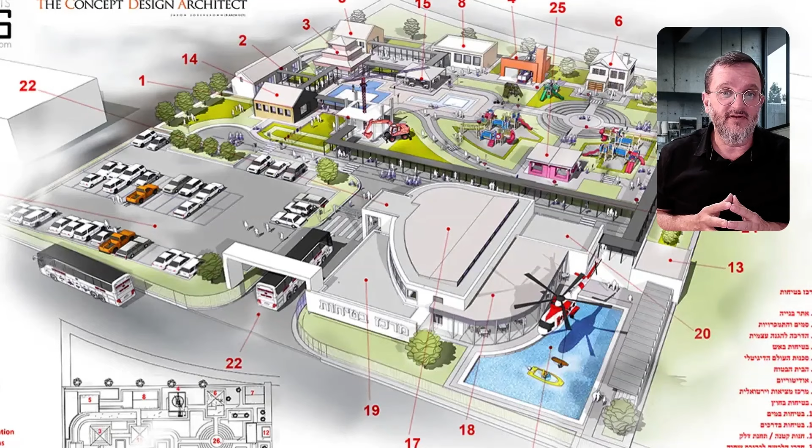Let's hear from some professional design architects about this workflow. What you're doing, helping everybody all over the world, is really something. Using this hybrid method and pulling these two together — I've been looking at this for 25 years and it's opened my eyes up. He opens up the possibilities beyond what you may know. It really blew me away, learning some fairly accessible techniques, putting them together to sell the ideas. You've taken very simple ways of using all the tools that we normally use, and rearranged the puzzle to create the most streamlined way of working. These aren't just some pretty pictures — they're strategic tools in the early stages of design and the design conversation with your client. They're impactful and can make all the difference. When clients see their ideas come to life in a measurable way with clarity, they're often more motivated to commit and move forward with confidence.

So in order to understand the process, we need to take a look at my virtual workflow and design strategy. Obviously, we meet with the client many different times, and each time we meet with the client, there needs to be a process in place that helps us reiterate design very quickly. Let's jump into our workflow.

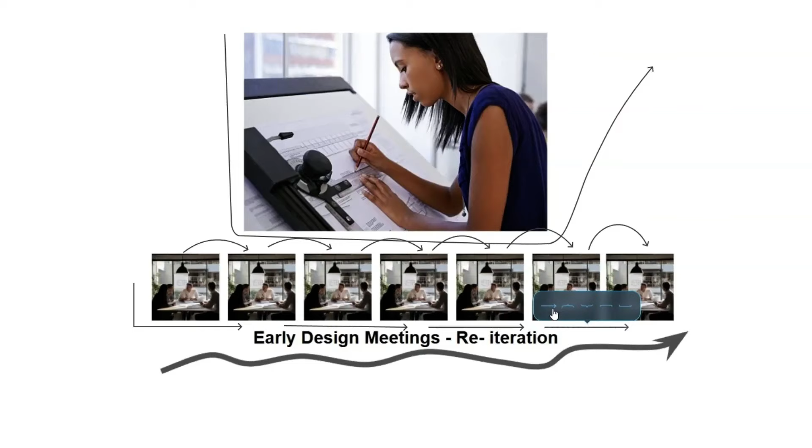So this is my suggested workflow and my virtual drawing board, and this is the way I traditionally work. Obviously, in the beginning of all projects, we need a schematic plan, and I normally use CAD or SketchUp to produce a 2D CAD image. But once we've got a 2D CAD image, we bring the foundational plan into Revit, and once we've got it into Revit, we do our design modeling — 3D modeling where we tweak the design and get it looking good.

And then I bring it into SketchUp. SketchUp's a very powerful tool because I can take a look at the Revit model that was produced in Revit and tweak it and fix it up. Once I do that, I can go back into Revit and make more design changes. This process is a recurring process that works as a design board. It's extremely powerful — not a linear process, but the virtual drawing board where you get to reconstruct, redesign, and reiterate your models using these two softwares, Revit and SketchUp. They work together like a brother and a sister. There's an unbelievable symbiotic relationship between these two softwares.

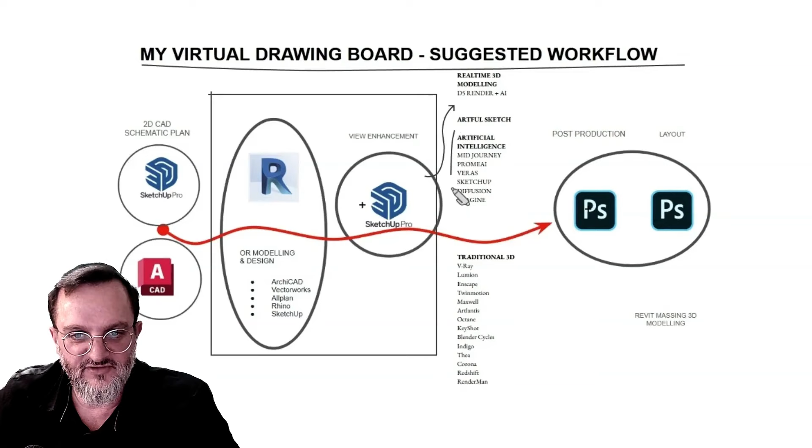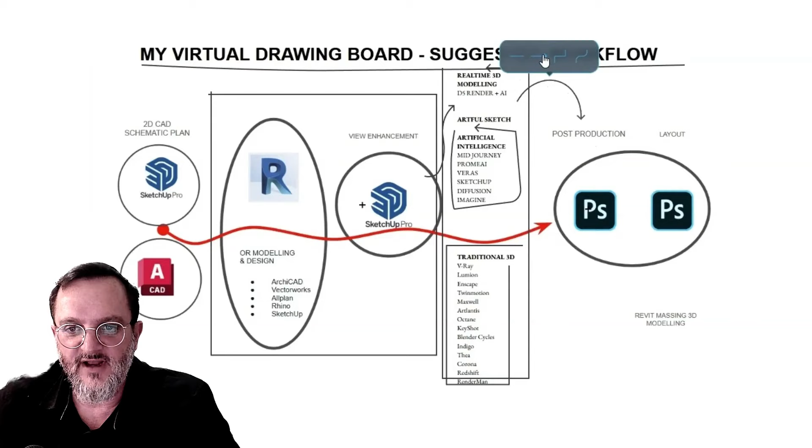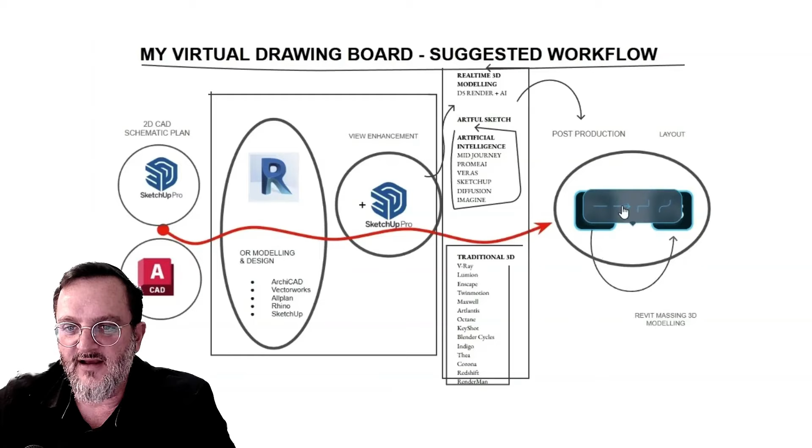Once we've finished our main design iterative process, which I call the virtual drawing board, we can jump into our rendering softwares, our real-time rendering softwares. We've got our artful sketch-like render, which is a more natural way of rendering. We have our artificial intelligence, which is really happening at the moment on the web. And then we have our traditional methods of old, which we can use to render as well. But once we've rendered our imagery, we can take our renders into Photoshop for finalization. We get into post-production where we soften our images, airbrush them, bring them to life in different ways, edit stuff out, and then finalize our imagery. By combining these two powerful tools in a symbiotic relationship, we achieve a more powerful result by overlapping the strengths of these particular softwares together.

And obviously Revit is extremely powerful. Why? Because it has a massing tool within it. Now, it's unique to Revit — I haven't found this tool anywhere else. But when we use Revit, we can reiterate design so quickly that it's unbelievable, because it's parametric, it's got walling systems, and it's very exact and precise. Where SketchUp is a tool that helps us visualize our 3D Revit model and also helps us tweak the design.

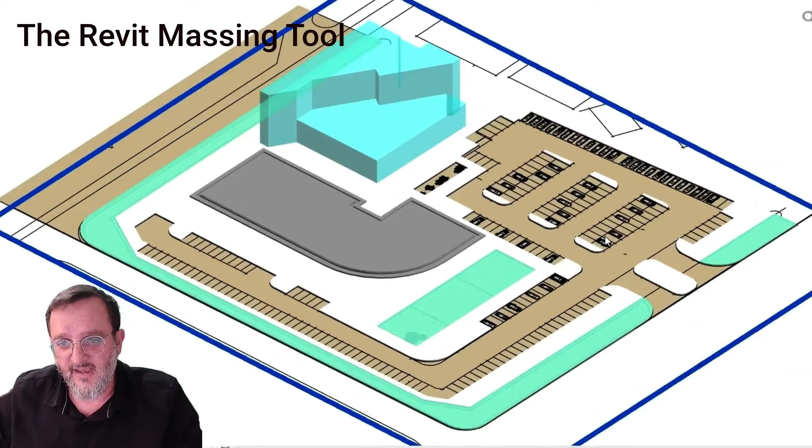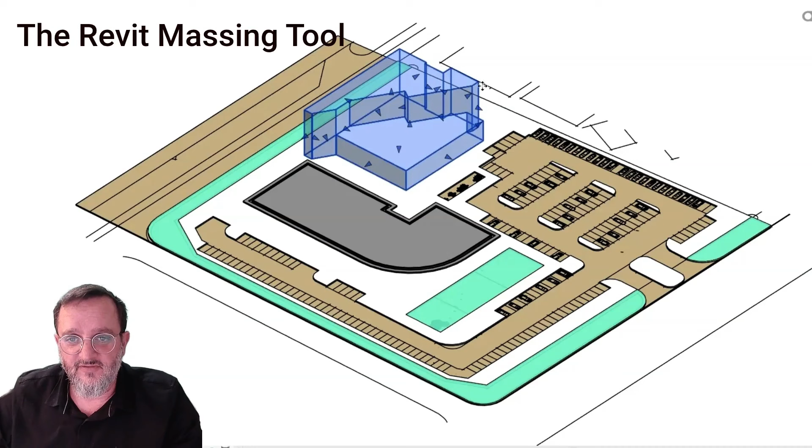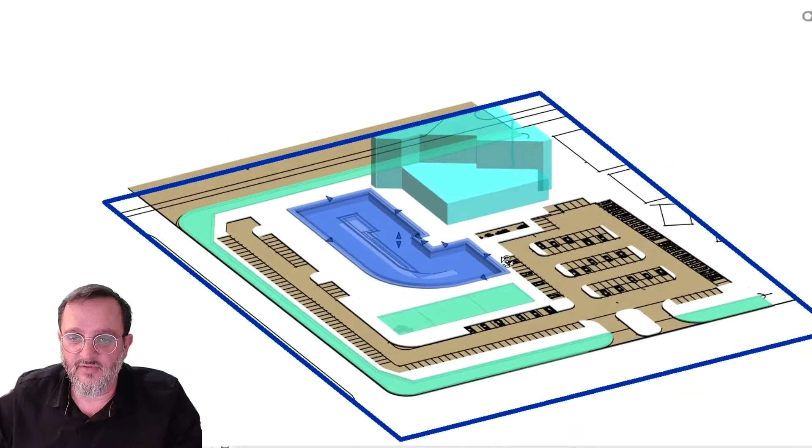So what we're presently looking at is an office park scenario with a mass of the actual office building, which is 4 stories. It sits on a canteen area, which is square, but the actual office space, which rises 4 stories above the ground, is a wedge shape. And we're going to work with this mass — I can show you how it works. In the foreground here is a water reservoir that also has a fountain, and then we've got public parking for the cars and the workers that come to this campus to work every single day. So let's go and take a look at how massing works.

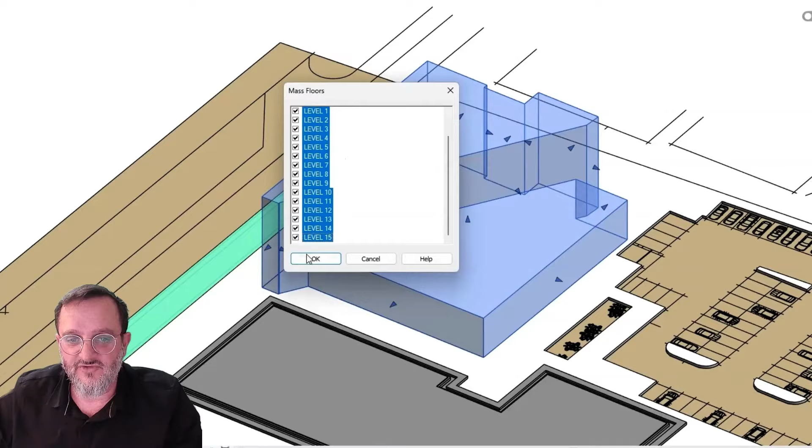We're going to manipulate this mass. We're going to pull it, we're going to push it. So you can ultimately model the mass by pushing and pulling all aspects of the mass, and we can also add all the level lines of the floors and elevation to the mass. So now we've got the floor areas associated to each floor cutting through the mass.

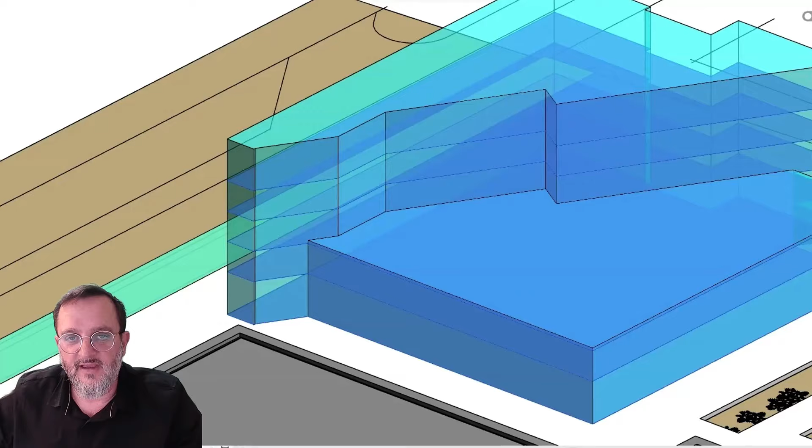And that's a very powerful tool, because once we've got something like this in play, we can go and add concrete slabs to these areas. And then we can update our model by hitting create floor, and then we've got floors in our model.

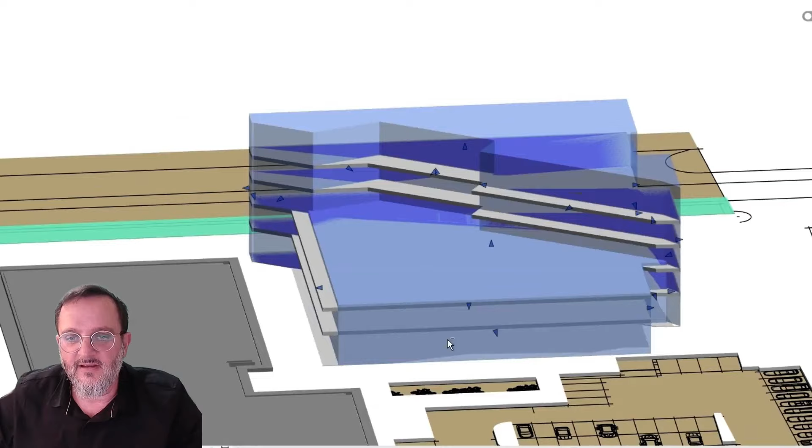Now, the beauty about Revit is you can reiterate your design. I'm going to push this backwards so you can see the slabs are sticking out here, and push this backwards as well. You can see these slabs are not sitting where they should be. Simply what you can do with Revit is click on the slabs and update to your mass, and it will fit back into place where your mass has moved. Very, very powerful tool for reiteration. That's the power of Revit and massing.

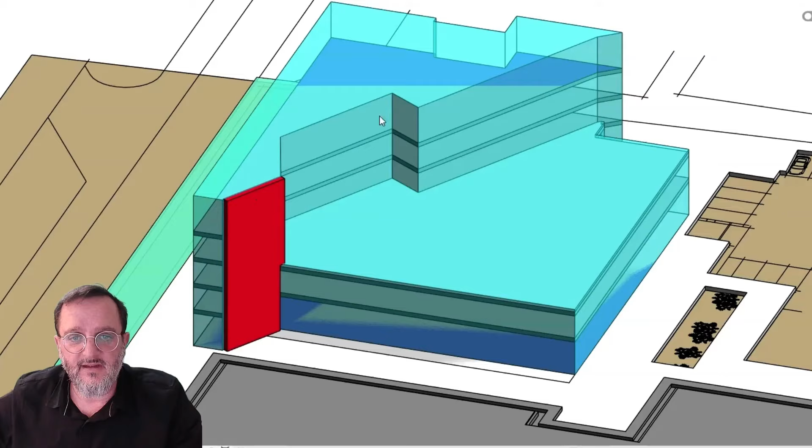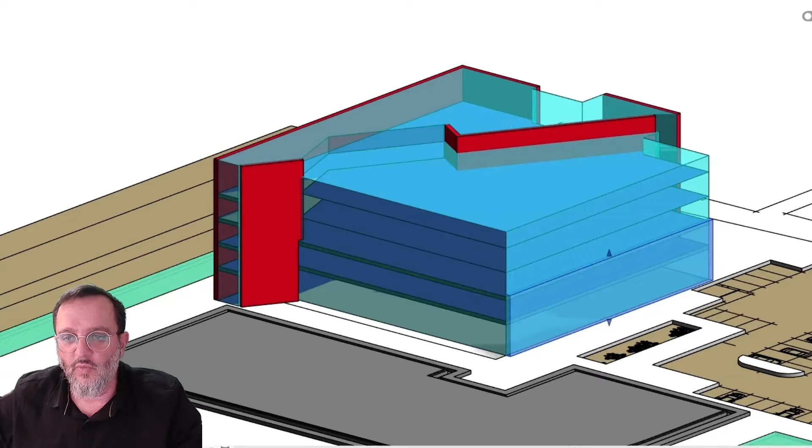The next step is we can also add walls in the massing function to the Revit model, and this gives us the ability to start enclosing the mass. We can also update these walls according to different things that may transpire in the future. For instance, as we lift the model in the front here, we can update this wall and it will stick to the mass. It becomes a very powerful tool. When reiterating design, you can completely attach and detach walls. We hit this to update again, and once again you can see it moves to that height.

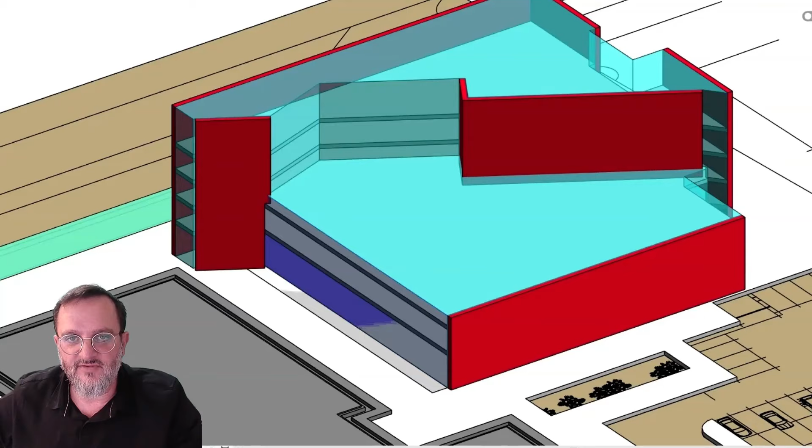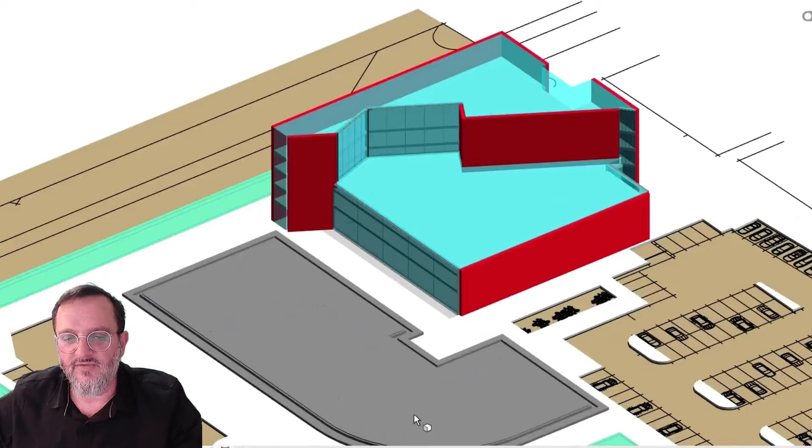And then there are curtain panels, which are mullions and glass mixed, and they give us a grid structure where we can set up glass facades in our model. Extremely powerful tool. We can also reiterate with the mass in the same way with these curtain panels, moving the facades backwards and forwards and so on, eventually coming up with something very seductive. This is the final mass.

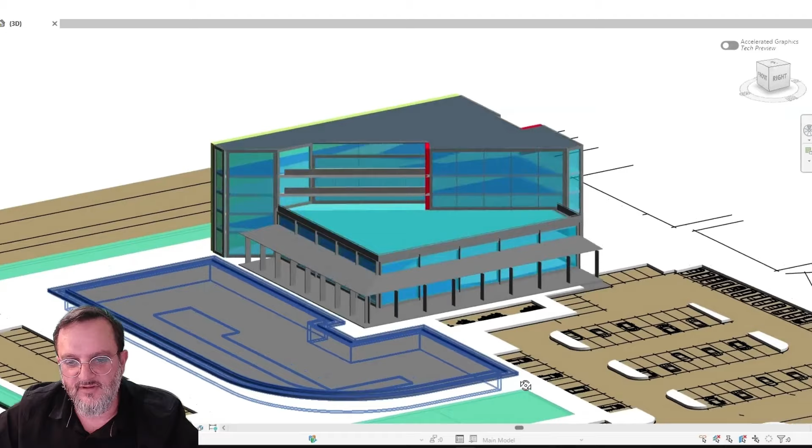We've got balustrading here, and balconies on the facade of this wedge-shaped building. We've got an outdoor area here on the roof of the canteen, and then this covered patio, which will host hundreds of tables so people can enjoy the weather outside. And then we have this particular reservoir, which will be filled up with water and look absolutely fantastic.

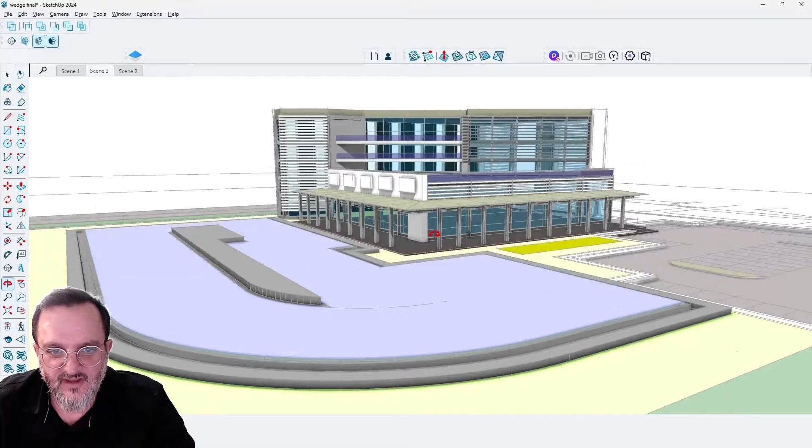Let's jump into SketchUp to see how the curtain wall systems on the front of this building actually work. So I imported the model from Revit into SketchUp, and it came in looking like this, really beautiful. If you take a look at the detail, it's just absolutely magnificent.

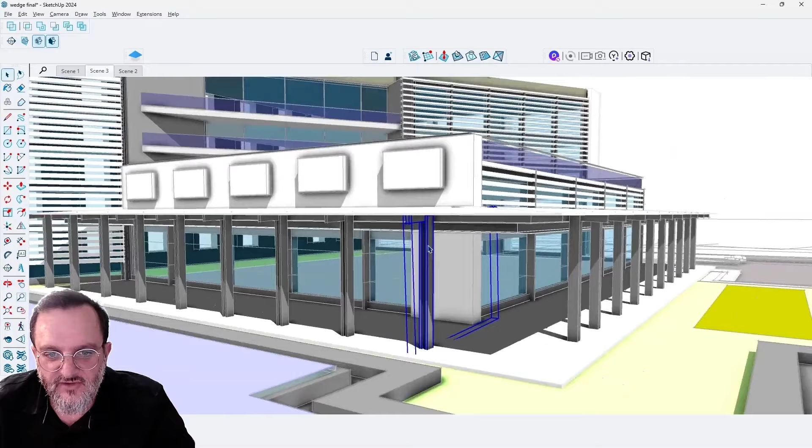I have, however, tweaked a few things. I have turned these single columns into dual columns, and also rafters that are poking out there. But as you can see, you can tweak things in SketchUp now, and because they resemble the family systems in Revit, you are able to tweak your buildings in a similar way. So you change one and all of them will change.

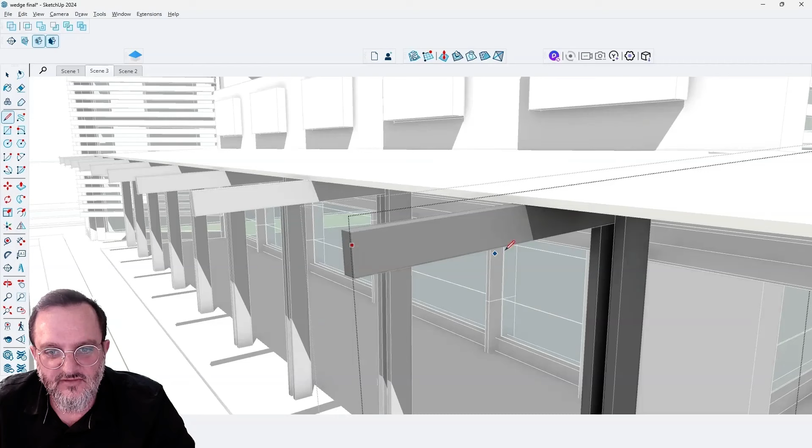You can also model in SketchUp where you can tweak your design, and it looks pretty amazing. So let's just go and tweak it. You can see all the other components changed with regards to that design change. Very, very powerful tool to help you iterate design. You can see I've also put horizontal louvers on this particular model just to give it that extra bit of punch, and it's looking magnificent.

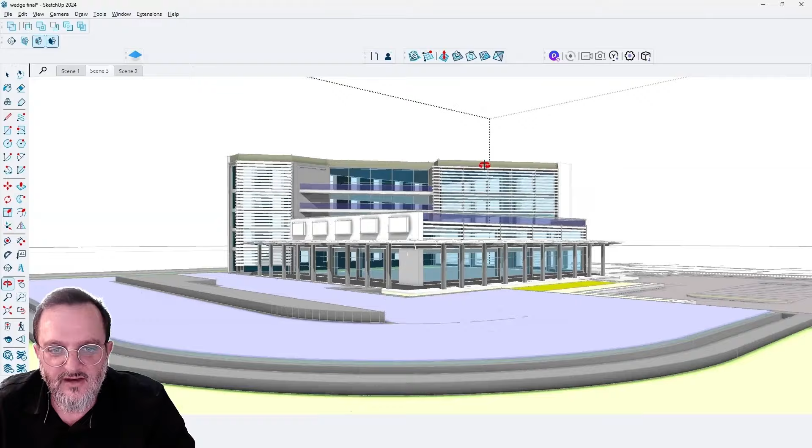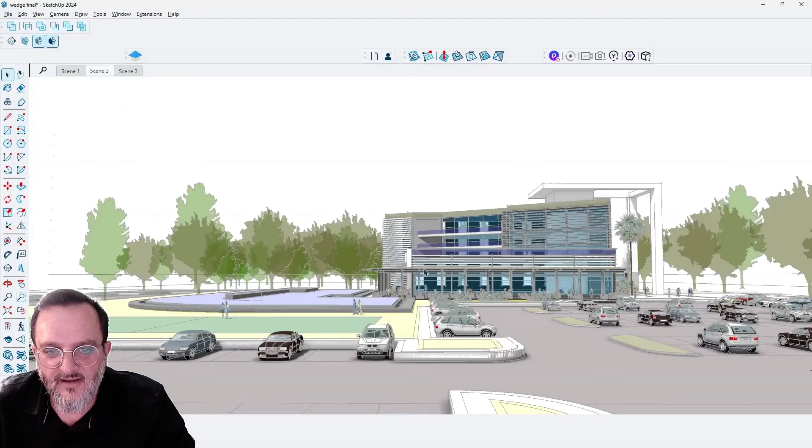The last phase of this process is to realize that you need entourage. There's no way to relate to a model when it looks very bare without any foliage or cars. So I'm just going to switch on what I did previously, otherwise it'll take too long, and you can take a look at how this model comes to life with everything that gets added. You get a feeling for the scale of it by simply adding the entourage to the process, and you achieve this magnificent look and feel.

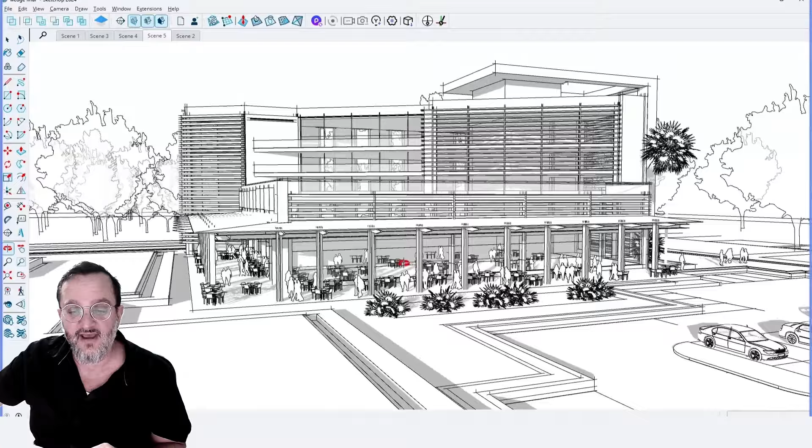So once we get into our final model, we look for the perfect views to save, and these views are very powerful because these are the views that are going to get our clients to buy in. But once we've found the perfect view, then we are going to jump into Photoshop to put everything together.

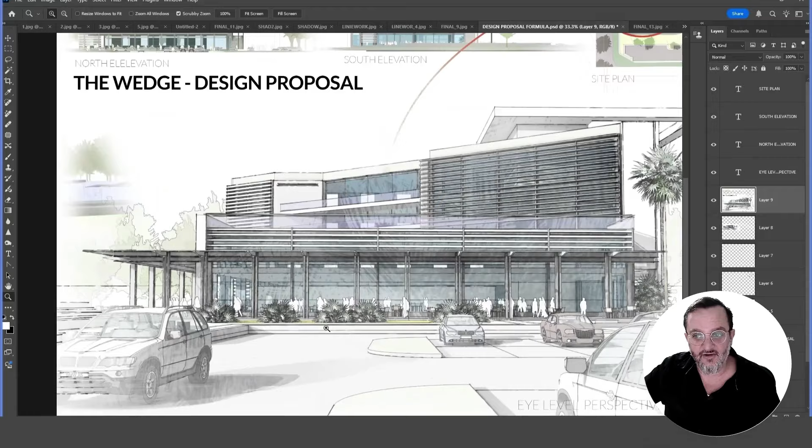Let's take a look at how amazing this image comes out in high resolution. This is just using SketchUp and Photoshop. There's no AI here. This is completely done by hand, and you can see the people, the plants, the cars, the magnificent feeling that you get from the line work from SketchUp mixed with Photoshop together. So there's no need for any accessories to add to your process.

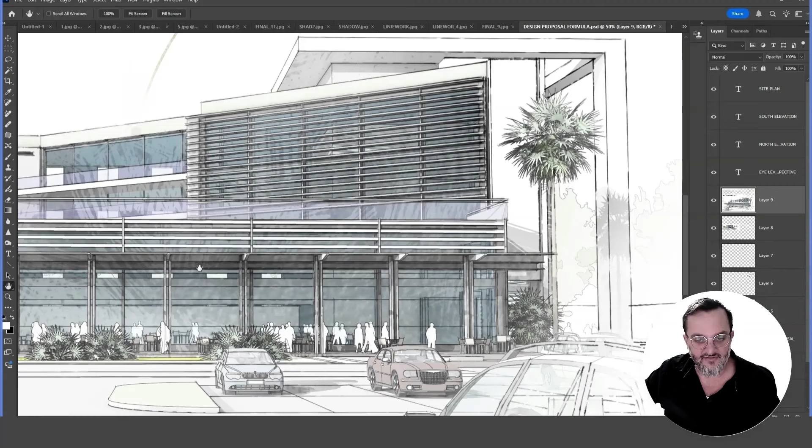Each individual image needs to be brought into Photoshop separately and edited a little bit, and this is the type of quality we can achieve by combining a few quick tools to get this amazing handcrafted looking image. So maybe now you can understand how to create more compelling work in an easier way upfront, to get your clients to buy in as fast as possible. When you show them work like this, it really gets the juices flowing.